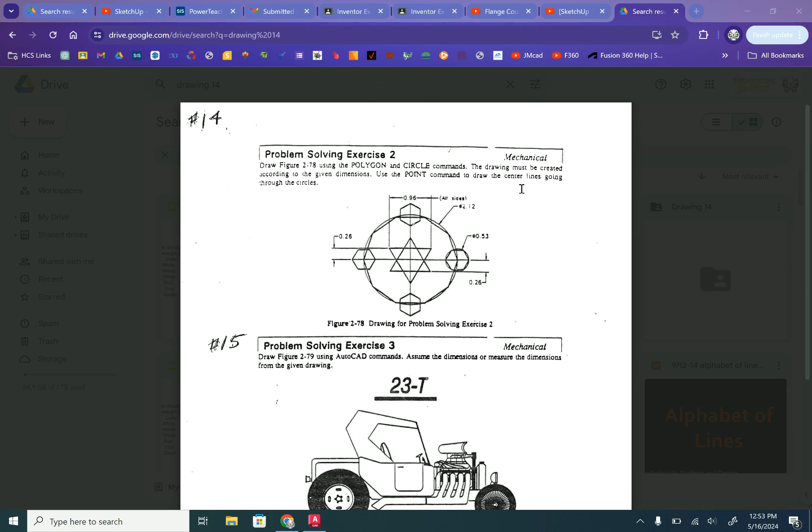We are going to draw this figure in AutoCAD that has one circle and it has a polygon with 10 sides, a decagon, and then it has a hexagon within a circle. And the diameter for the circle, the bigger one and the small one, is given, and then there is a triangle as well. So the instructions say that using the polygon and circle commands, the drawing must be created according to the given dimensions. Use the point command to draw the center lines going through the circle.

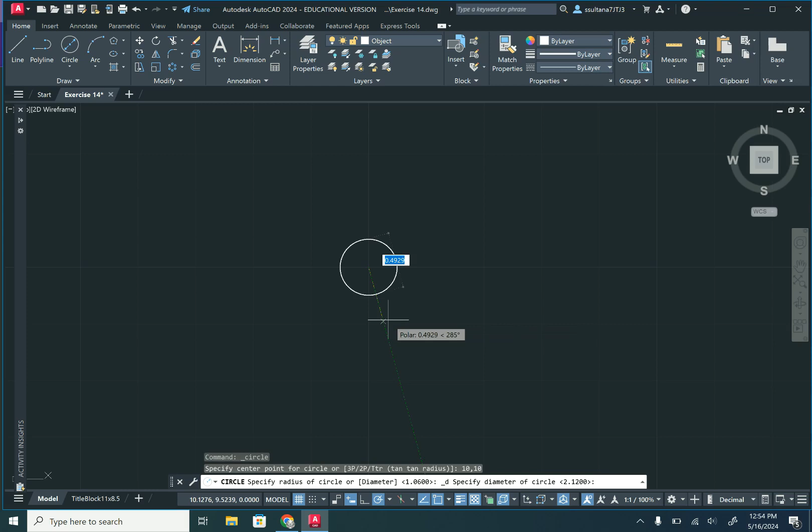Let's go to AutoCAD. Your title block template that has the layers and the title block. Go to model space. And since the diameter is given for the circle, select the circle with center, diameter. Make object your current layer and draw a circle at 10, 10. Diameter 2.12. And then there is a polygon. Number of sides 10.

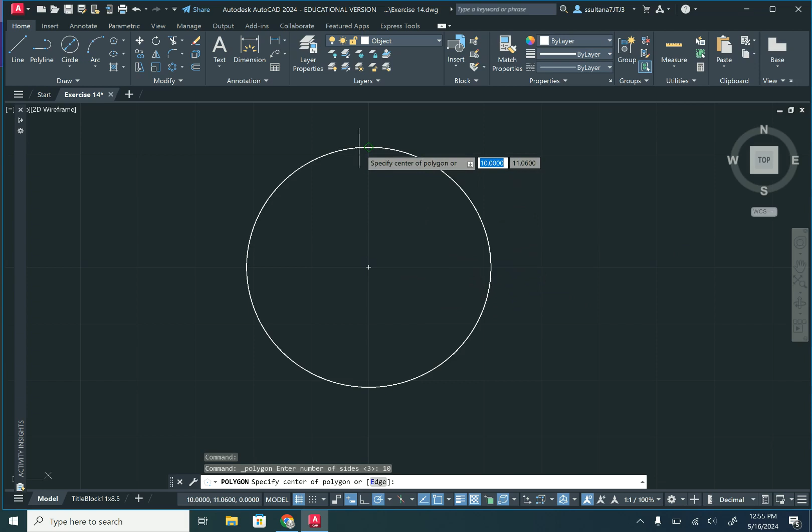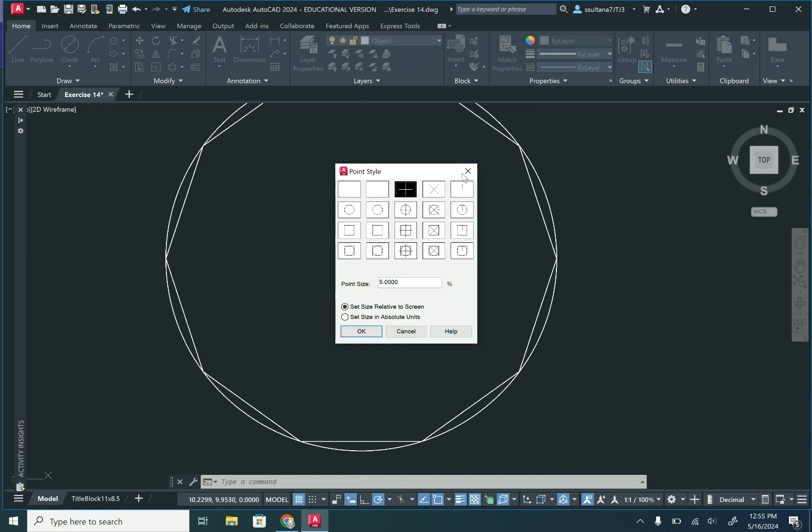If you hover over the circle, you will see the center, and you are going to choose inscribed in circle and then drag it and then click on the right quadrant of the circle. Now it did mention to draw the point, so type point. And to have a mark on that, you have to select PTYPE. So there is a command PTYPE, and you're going to select any of those types. So I have selected this one, otherwise it's not going to show the point at all. So it shows the point over here.

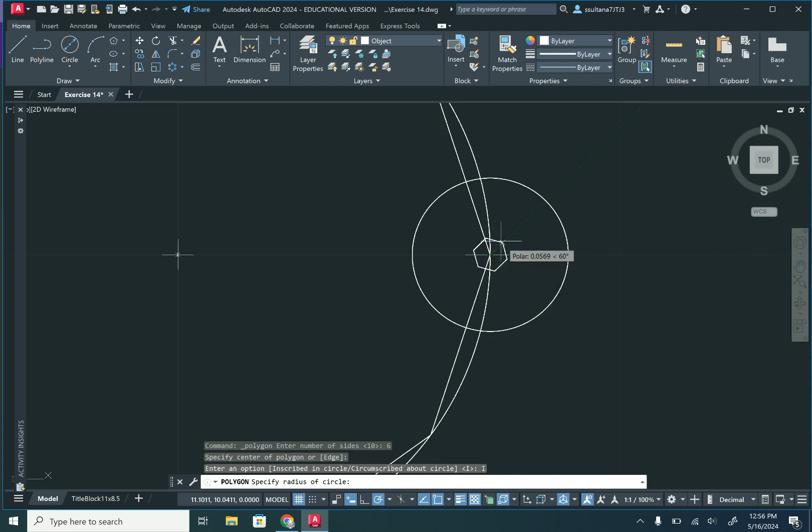Now let's draw another point that's going to be the center of the smaller circle. And now draw the smaller circle with diameter of 0.53. Polygon, and polygon is a hexagon, so 6 sides. This is the center. Inscribed in a circle and drag it to the right quadrant of the circle, because the top of the polygon is flat in the given figure, and same over here for the decagon. The top side is flat.

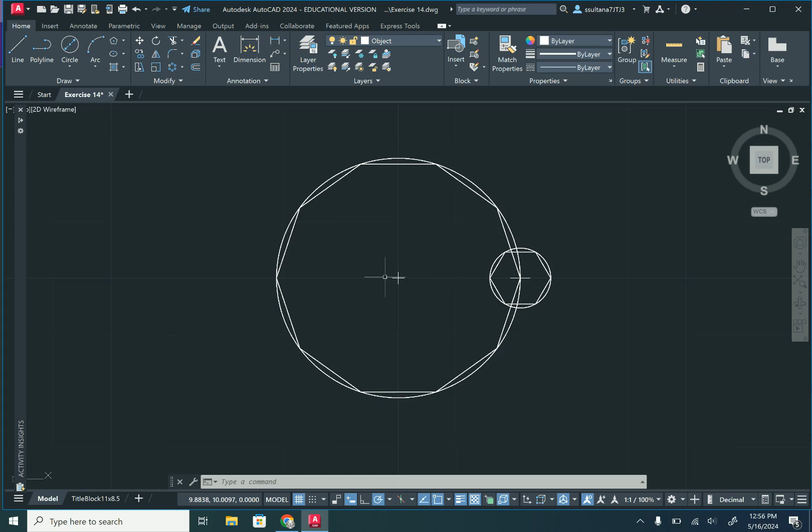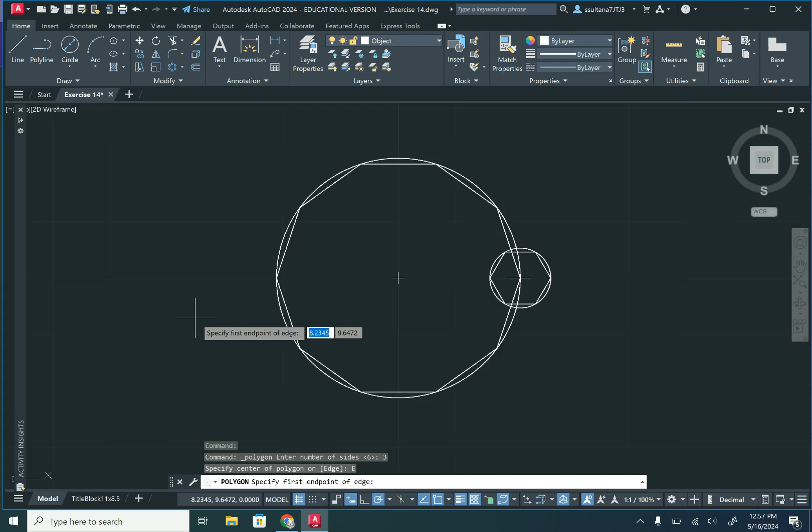Now there are two triangles that are making a star, overlapping star. Again, select the polygon, and this time the number of sides is 3. And you're going to select edge, so either you select edge over here or type E, and then specify first end point of the edge. You can select anywhere, and now you are going to give the dimension for the side, and that is 0.96. And now you can move this from the geometric center to the center of the circle.

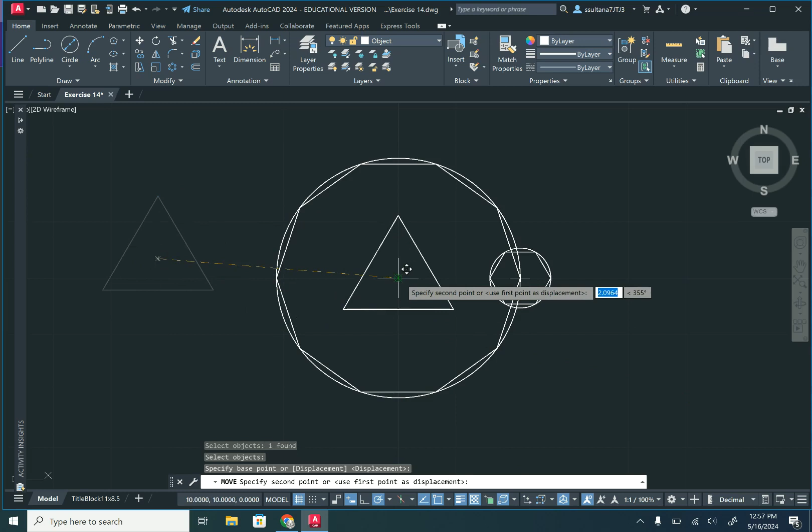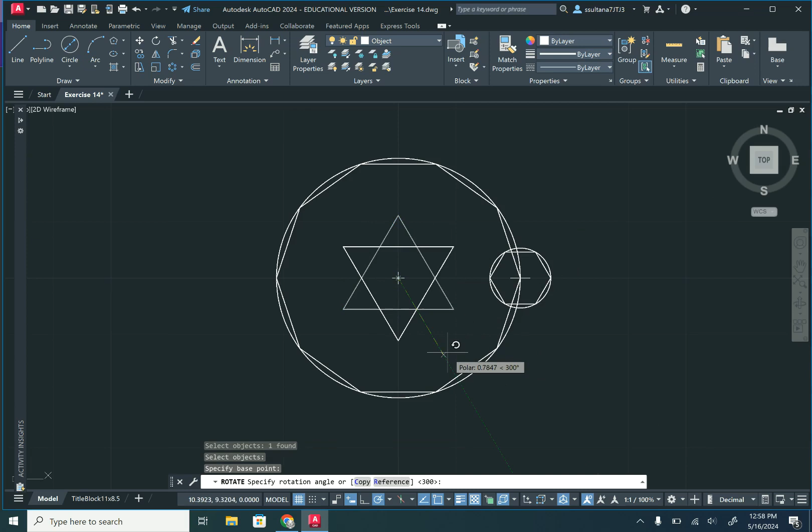Now you can copy this, enter, click on the center, and then click on the center again and escape. And now use the rotate command, enter, click on the center, and then I have the polar tracking on. So I have that on 300 degrees, rotate it. So polar tracking is right here, and I've selected 15, 30, 45, 60 angles.

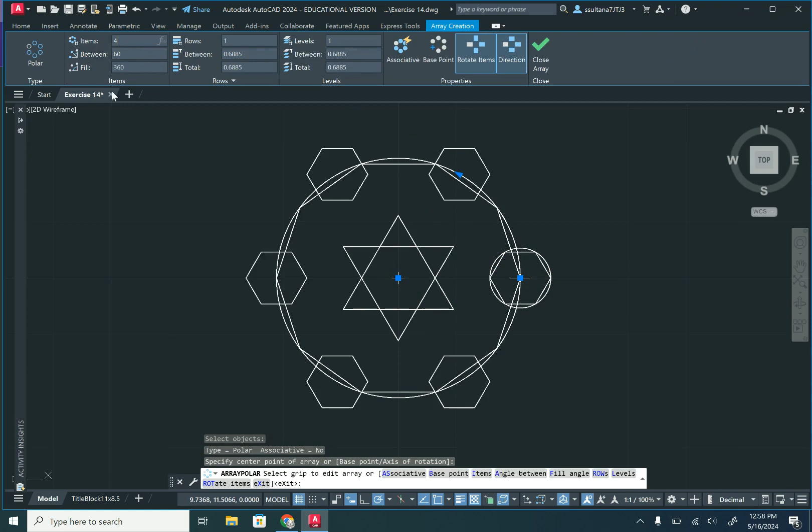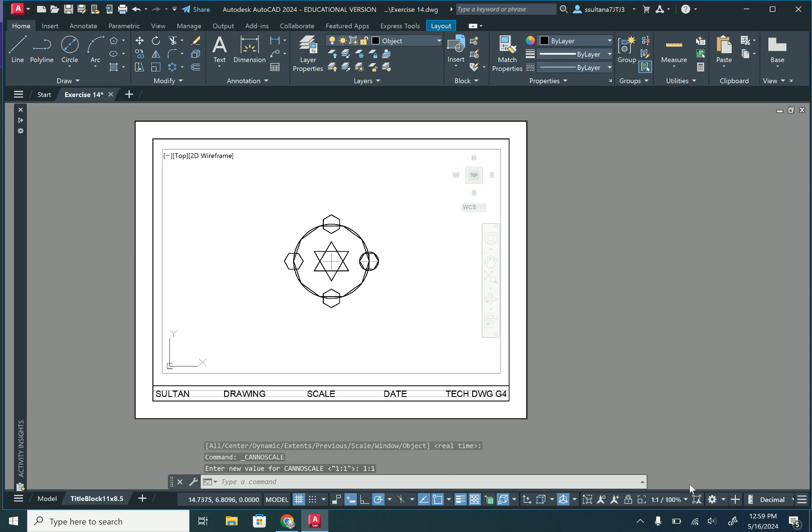Now you are going to use polar array. Select the hexagon, right click, click in the center, and then change the number of items to 4, enter, and that completes the drawing. Now go to the title block, double click inside the viewport, and then zoom extents, and over here you're going to select an appropriate scale. So 2:1 scale looks good.

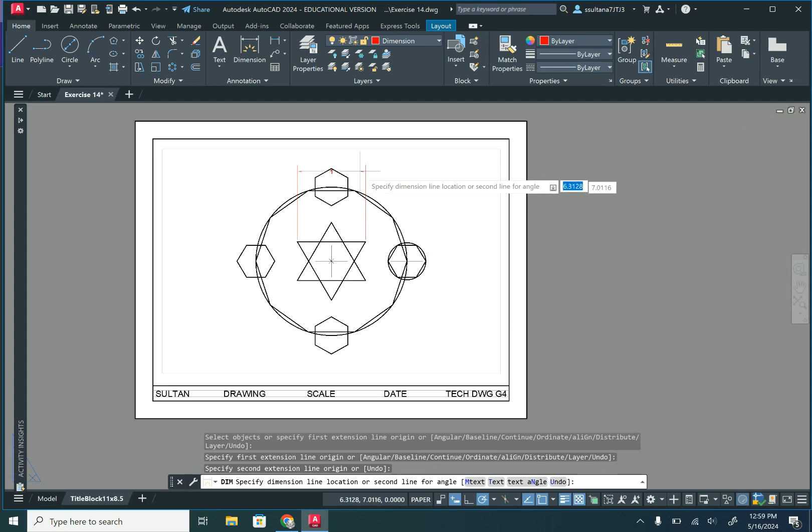Then you can lock the viewport, and over here double click outside the viewport so that you are in paper space, and then go to dimension layer. Now you're going to add the dimensions as it was shown in the figure. Now as you can notice, we had 2 decimals in the dimensions, and over here we have only one whole number. So we're going to fix our dim style,

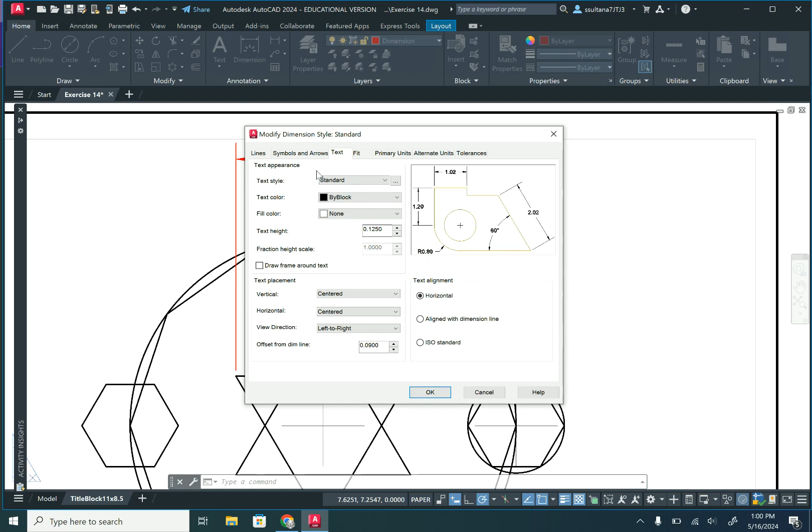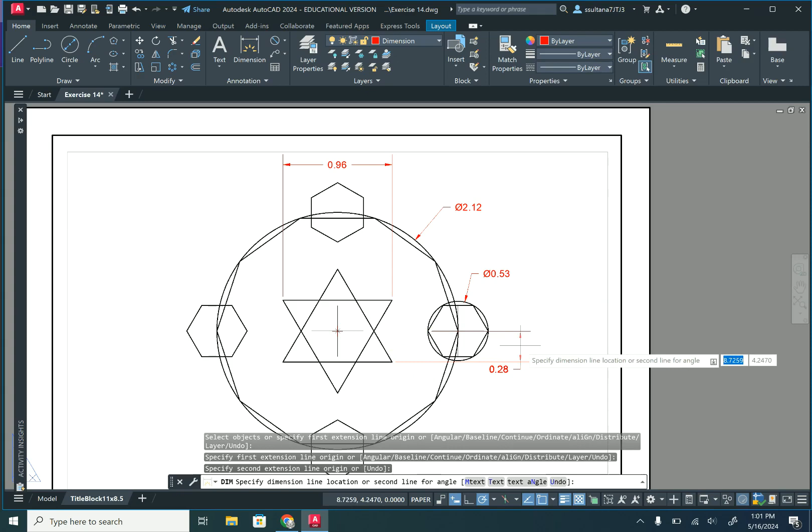modify. Over here, primary units, you're going to change the precision to 2 decimals, and then text, the height is 0.125, same with the symbols and arrows, 0.125. Okay, close. So that's your updated dimension. Then diameter of the circle for the smaller circle. And that's all the dimensions that you need. Update the title block. Scale was 2:1.